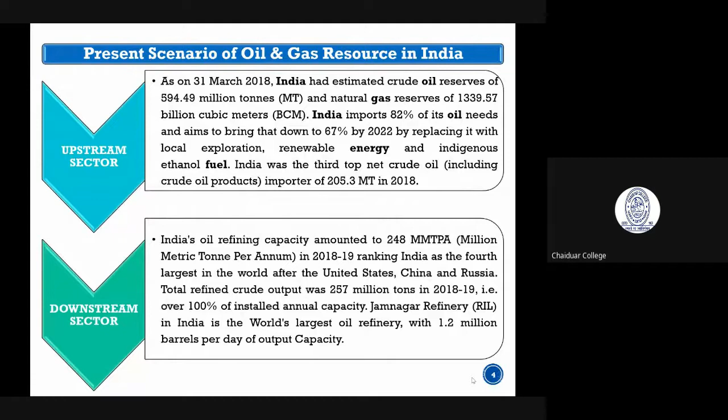Am I visible, Raju? You're not getting me. Yes, I've seen you. No, I got a message - this internet, it's due to some problem from my side. No problem, you can carry on.

So the entire sector is basically divided into three sectors: upstream, downstream, and midstream. Upstream sector is the sector which explores oil - they dig and find oil across the globe, like Oil India and ONGC. We find oil from beneath the earth. That is called the upstream sector.

Downstream sector is where crude oil and gas are used by companies and given as finished products to your home, like petrol, diesel, LPG. These are the finished products. That stream is called the downstream sector. So these are the two extremes - upstream and downstream sector.

Then there is the midstream - midstream is the pipeline sector. Whenever we produce oil in a particular field, we have to carry it to the refineries, isn't it? So that sector is known as midstream. Oil India works in all sectors - upstream, downstream, and midstream.

So what is the present oil scenario in India? As of my data, as of 2018, the oil reserve is 594.49 million tons, and natural gas is 1,339.5 BCM, billion cubic meters.

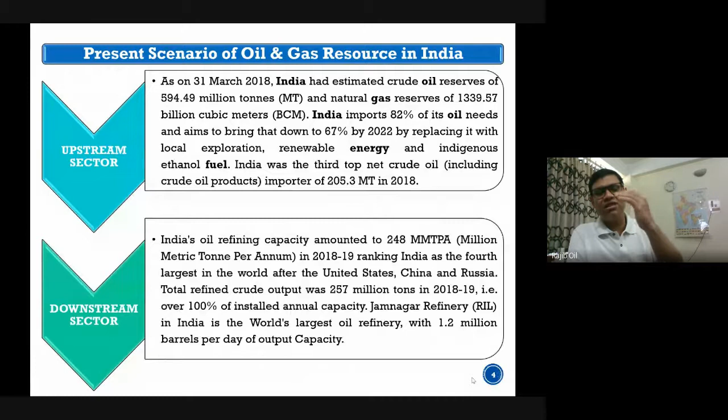Next is downstream - the oil refining. We have a total capacity of 248 million metric tons per annum. We actually have around 23, 24 refineries with different capacities. We bring crude oil from other countries, refine it, and supply it to meet the needs of the people.

As per the 2018-19 ranking, India is the fourth largest in the world in terms of consumer of the energy sector, after United States, China, and Russia.

It is growing daily because of our development. We are a developing nation, so development is going on across India, from Kashmir to Kanyakumari, from Assam to Gujarat. I'm not just talking about infrastructure development, but all sector development. These sectors need energy, so we are becoming the fastest growing energy consumer in the world as of today.

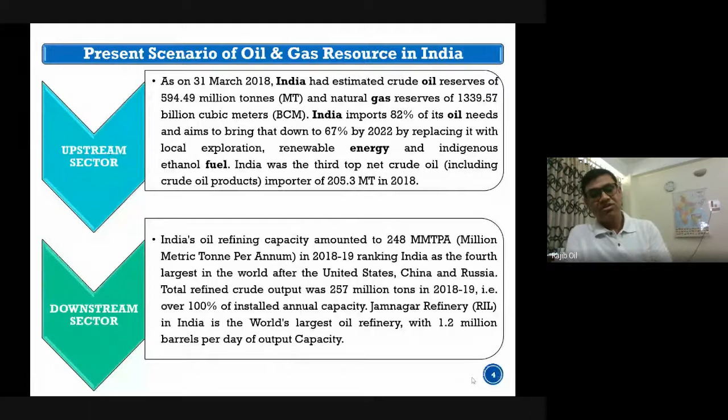So next, as I told, it should be 23 refineries - the 1 and 2 was mistakenly taken due to a copy paste technical glitch. So we have 23 refineries in India.

But how much do we actually have in India, or in Assam? We have 4 refineries, particularly Chaiduar, and nearby there is the Numaligarh refinery.

So I'm giving some history about these refineries. The Digboi refinery was the oldest refinery - it was established in 1901. Then subsequently we had 4 refineries set up at different times to meet the requirement of crude oil production in Assam.

But the current production we have in Assam basically cannot feed all the refineries. Those 4 refineries cannot be fed by the domestic production of Assam alone. So how much does Assam have? ONGC produces around 1.5, and we produce around 3.3 to 3.5, so you can say less than 5 million metric tons. But if you see the capacity of our refineries, Digboi is 1 plus, Numaligarh itself is 3, Guwahati is 1.5 plus, and I am not even speaking about Bongaigaon refinery. So that's why crude oil now has to be brought in from other parts of the world.

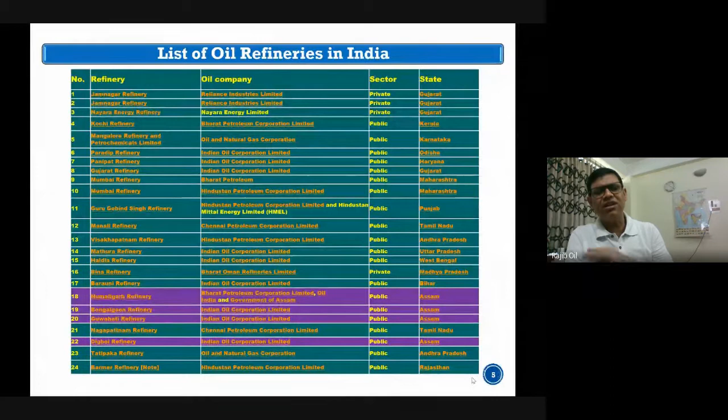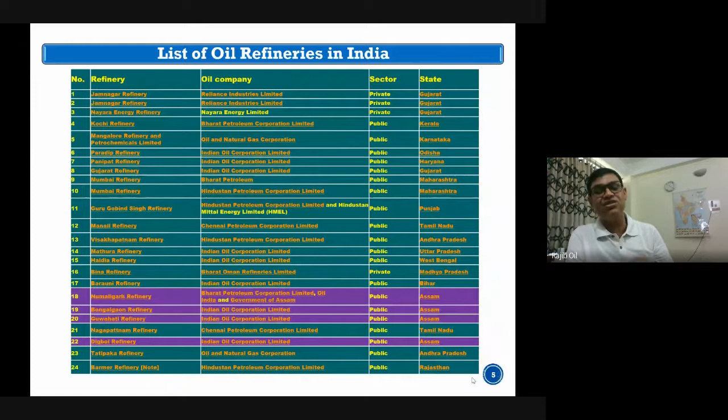You might have seen recently there was a survey in the Tezpur area also. I don't know whether Gohpur was covered. So another national seismic program is mapping from the nook and corner of India, to find where we have proven reserves. If reserves are found, the government is insisting on exploring them more and more.

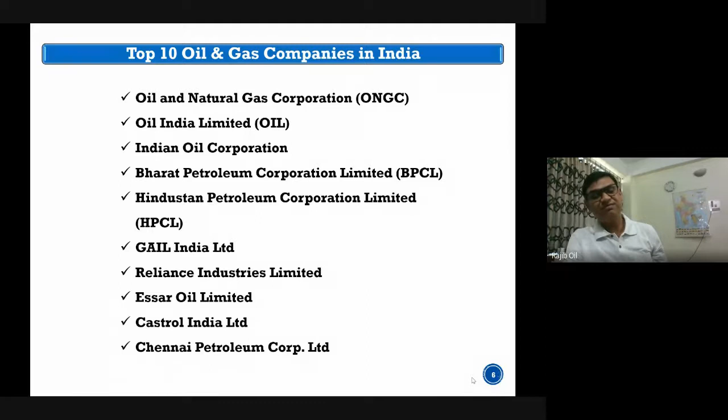So there is a chronology I have given. First of all, everybody knows oil was discovered in Digboi field by W.L. Lake of the Assam Railway and Trading Company. Everybody has heard some rumors about this - Digboi, 'dig boy', that it was found by an elephant. Actually, the oil was discovered accidentally, not intentionally. Their railway track construction was going on, and they had to cut wood from the forest. Then one fine morning, a person noticed that one of the elephant's legs was soaked with oil. They investigated and found that oil was floating on the surface. That was a dream discovery. So this was discovered in 1889.

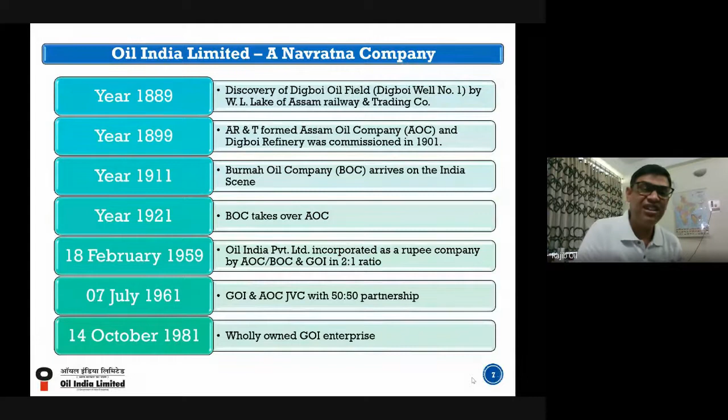Burma Oil Company, though the name includes Burma, it is not the Burma company, it is an England company, from a nearby Burma region. Then Burma Oil Company took over AOC. Though AOC was taken over by Burma Oil Company, AOC is still continuing, and the name is still continuing. Then on 18 February 1959, Oil India Private Limited was incorporated.

On 7 July 1961, Government of India and the Assam Oil Company formed a joint venture, a 50-50 partnership. On 14th October 1981, it became wholly owned by the Government of India.

So students, these details may not be relevant to you now, it might sound like French, but in terms of the business scenario, you will understand later. What you need to know is the first oil was discovered in 1889, and the first refinery was there.

I am giving you the background of Oil India. Now, Oil India is not a private company, it is a complete government company. We are the government employees of Government of India.

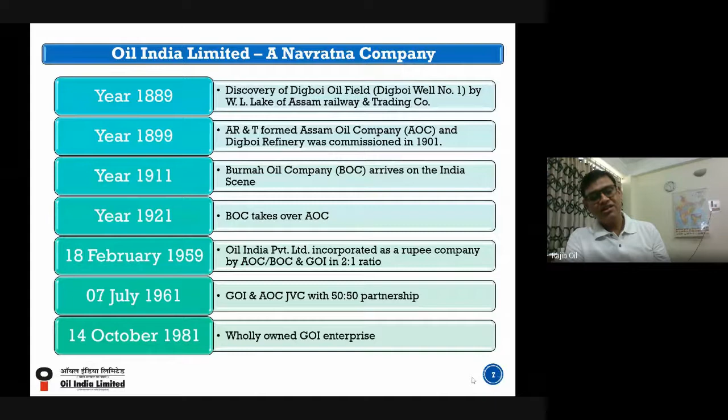Next slide please. So again, this is the chronology I have already told you: independent India's first commercial discovery was in Nahorkatiya in 1953. What Duliajan is today is only because of this. Earlier, Digboi was the center up to 1953. In Nahorkatiya in 1953, the first oil was discovered.

Now that oil is still flowing. I forgot to tell you, Digboi number 1, which was drilled a century back, is still producing. There is a very big museum there. If you have not visited, please visit Digboi to know the legacy of the oil sector, from the elephant to the man with sophisticated equipment. Everything is nicely framed there.

And then after 1953, Nahorkatiya, the Moran field was discovered. Moran was a very prolific producer, we produced a lot of gas there. Now the field is still there, but unfortunately Moran is dwindling now, production is not as expected. Anyway, the Moran field is still there.

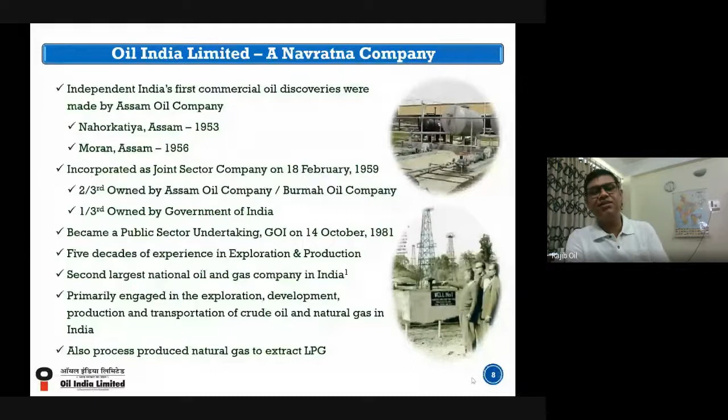So whatever LPG you are using in your kitchen, some of it may come from Oil India Limited, it is sure that some of it comes from Oil India Limited gas, and some LPG cylinders may come from Oil India Limited to you directly also. But since we don't have the business license, the business is done through our partner IOC. Next, please.

So our core business of Oil India Limited consists of exploration, exploitation, and transportation and refining. Exploration means finding out where your chance of finding oil is there or not. So there are some systems for that, like the seismic survey.

These are new terms to you. This seismic survey is basically a sophisticated survey, like a scanning of the earth. Whenever something goes wrong in our body, we do MRI, scanning, X-rays, all these. The seismic survey is nothing but that only. They're scanning the mother earth to find whether oil is there or not. After scanning, your technocrats can find out where oil is there or not.

Presence of oil is not the prime criteria - whether economically viable oil is there or not matters too. For that purpose, if oil is there or not, we have to drill. It is like an operation. So when doctors find from radiologists that some tumor is there in a particular body, then you have to proceed. Similarly, drilling is there to find out actually whether oil is there or not.

So on the basis of seismic survey alone, you cannot say that oil is there. For that purpose, drilling is a must. Drilling is nothing but - everybody has seen drilling, you may say you have not seen it, but you have seen the water pump. That process you have seen is a similar process, just in an advanced stage.

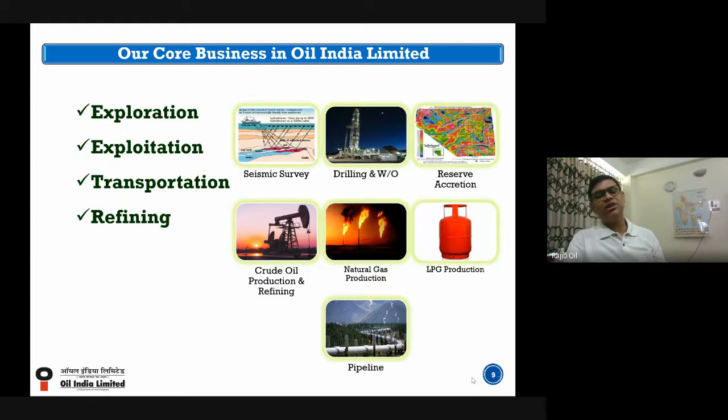So another pipeline is coming up from Duliajan to Numaligarh. You might have heard the Assam government has already announced giving gas to the kitchens of the people of Assam. So one gas gathering station is coming up. It will be fed from Duliajan and other parts of the country, so that people should not need to switch to LPG cylinders. It will be directly fed like a water pipe, to your kitchen in an economic and safety manner.

So oil business upstream, as I told earlier, consists of survey - the seismic survey I mentioned - and drilling of crude oil and natural gas, and production, and crude oil trunk pipeline, that's NSPL, the Numaligarh Siliguri pipeline I already told you about. Then DNPL, that is the Duliajan Numaligarh pipeline for gas, which I've also told you about.

Then LPG and production of NRL, and I missed one organization - BCPL, Brahmaputra Cracker and Polymer Limited. It is also in our loop. This Brahmaputra Cracker, popularly known as the gas cracker, is located in Lepetkata near Dibrugarh. The gas is fed by Oil India Limited, so it is also dependent on Oil India Limited. If Oil India Limited cannot supply proper gas, then BCPL cannot run. So to run the gas cracker and secure the future of Oil India, we must produce more and more good quality gas.

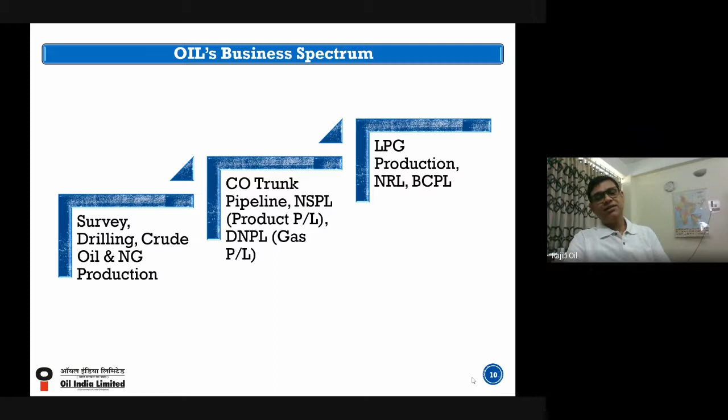So the oil business is geophysical. I have already told you, geophysical data processing and interpretation is nothing but the technocrats seeing how data is there.

Geochemical, I have not told. This geochemical is the role of the chemist. Actually in our curriculum, this is not part of this part of Assam. Though we are very rich with century-old operations, geophysics and geochemistry is not part of our curriculum. This is basically, I should say, a sorry state of affairs. Our university is doing all the conventional courses, but geophysics and geochemical, where employment opportunity is there and required, we have to create people of Assam trained in geophysics and geochemical, but unfortunately we don't have any course in any of the colleges and universities of Assam.

So I request through our principal sir, you please take this up to the higher-ups, so that they can introduce these courses in your college itself. This will be very great, and Oil India, ONGC will help you definitely in setting up this type of courses.

This geophysics and geochemical - we are studying physics and chemistry, the conventional courses. So these are specialized courses, geophysics and geochemistry rather. So we don't have geochemistry. We are doing the job of geochemistry, but we don't know chemistry - only the geology part. It is not really possible, but somehow we are running the show.

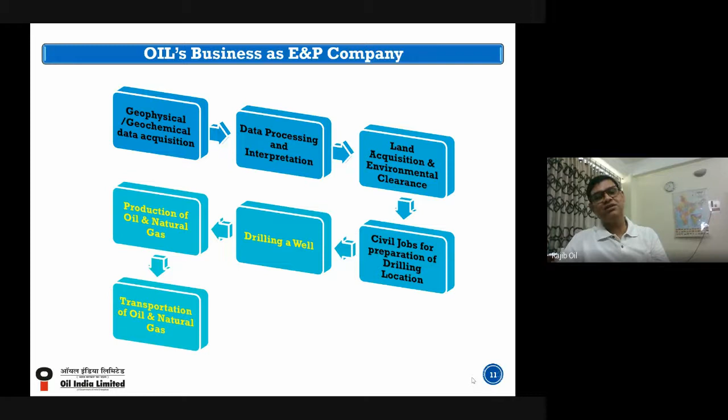So now let's come to where Oil India stands. Oil India is like a pan-India company, operating across India with many places. But we are more prominent in Northeast India - in Assam, Arunachal, and Mizoram. These three states we are operating in as of today.

But we have other parts too - in Rajasthan we are producing fuel. There are some blocks in Gujarat, some blocks in Kakinada where we are working, some blocks in the Kaveri Basin at the extreme bottom of India. Then we have operations in Bhubaneswar, that is Paradip.

Then there is some operation in Jodhpur. We have a producing field there - gas is being produced in Jodhpur and sold to the Rajasthan State Electricity Board. In addition, we have some wind power and solar sectors in Gujarat and Rajasthan. So these are the pan-India footprint of Oil India Limited.

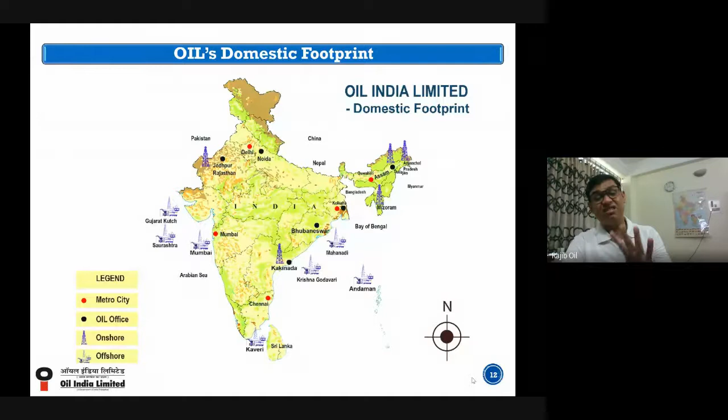So in addition to Pan India, we have international presence. We are working, or actually we have worked in Libya. Then we have 2 blocks in Bangladesh, which we are yet to operate there. Then we have some stake in Mozambique, Yemen, Nigeria, and Gabon.

Last year, oil was struck in Gabon. This is a very prolific field. Hopefully we can produce more and more oil for the country in Gabon. That one is not there in the map.

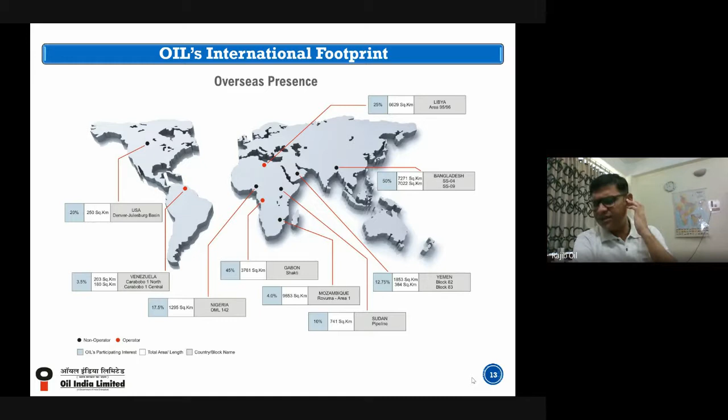We have a big stake in Russia, which is producing a lot of volumes of oil, and we have an office in the US and an office in Singapore also. These are basically commercial offices, but the rest are exploration stakes where we don't operate directly, we operate in conjunction with other companies. So we have a stake, and whenever oil is produced in those countries, that will be beneficial for our mother India.

So now I'll say something about how oil is being produced.

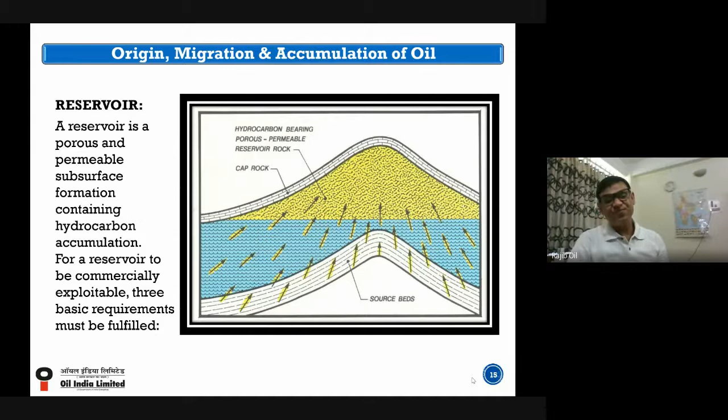Susuban, are you online?

Thank you. So next, there are some geological structural changes going on every day. Actually, over millions of years, our reservoirs are not smooth. Some reservoirs go down and up, and that is called the faulted reservoir.

For example, for common people, I am telling you about Burapahar, near your place. Whatever rock is on the surface at Burapahar, that rock goes down towards Upper Assam, going deep towards Duliajan and Hodia, deep around 5,000 meters. That means whatever you are seeing at the top of the hill at Burapahar, that is going down up to 5,000 meters at Hodia and Duliajan. So that is the place, the granite base, basically where oil will be there.

Oil will be there, but oil will not produce on its own. That particular formation is kind of a pot. That pot is there, going through from Burapahar to Hodia and extending further. It is not yet explored. So this type of geology is there.

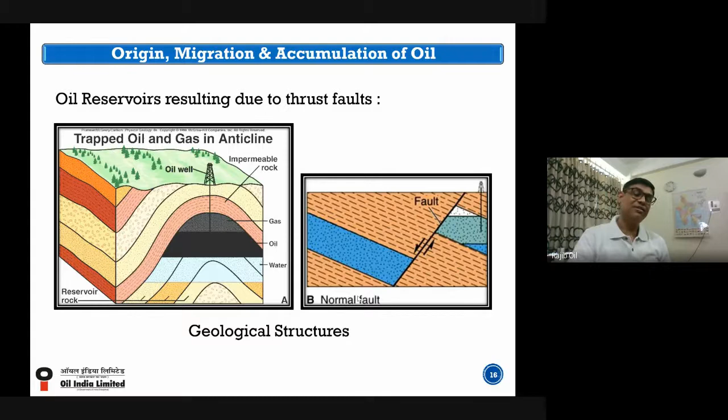So now what is the role of chemistry? The role of chemistry is in the geochemical and biochemical survey. Geochemical survey means studying whatever is there in the mother earth, and from that study we can predict if oil is there. This type of study is conducted by Oil India, and not only Oil India, the Geological Survey also conducts such studies. On the basis of surface geology and geochemical study, people can say that oil must be here. That is one of the angles of studying the presence of oil.

Next, coming to drilling. After getting the sweet point where oil will be there, we have to do drilling. For drilling, we need a fluid, the drilling fluid. Though I am calling it drilling fluid, it is popularly known as mud. Mud, we all know it as mud. It is like mud only.

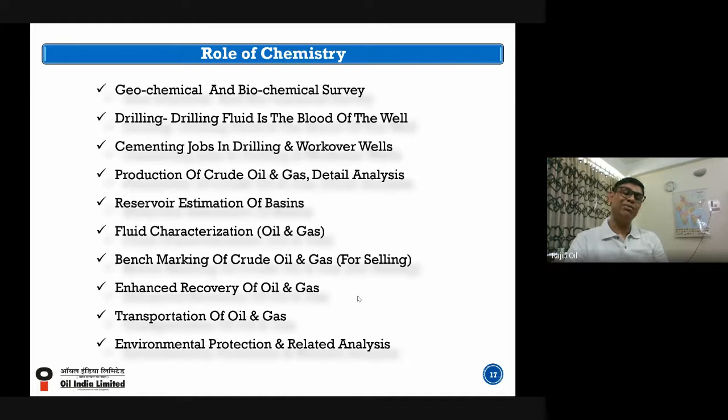That is the cementing job in drilling and workover. Cementing job is like our usual cementing only, nothing new. What we do—whenever we drill wells, you might have seen deep water wells where we don't normally cement; we just keep sand or whatever around it. But to give some strength to the pipe, we need to cement it. So cementing is done. It's normal cement, nothing special there, but since you have to cement a pipe from 5,000 to 6,000 meters, the technique and technology will definitely be different. So there your chemist's role comes in—you will design the cementing, how much water will be given, what components are there. That will be the job of the chemist.

Then, production of crude oil and detailed analysis. Production alone will not suffice; we have to analyze it too. Whatever is produced in India, in Nigeria, in America—their crude oil will definitely be different. So some mechanism is there to give the price based on quality, and quality depends on detailed analysis, which is done by our chemists only.

The reservoir estimation of the basins—reservoir estimation is nothing but figuring out how much reserve is there. The role of the chemist is there too. Fluid characterization is like the detailed analysis you have to do. Then there's the benchmarking of crude oil.

Benchmarking of crude oil means that every crude oil from different parts of the globe will have different parameters. So there are internationally agreed benchmarks necessary. Suppose your sugar level—how much is it? If it is more than 140, you will be called diabetic.

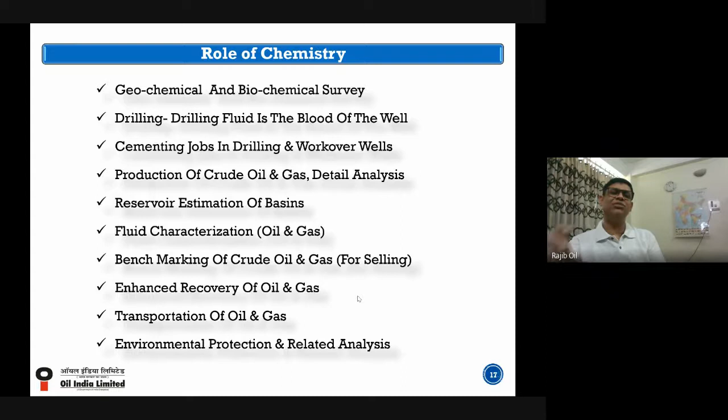So for all weather conditions, we have to give treatment. For transportation we need to import some chemicals, and that is being done. There's no general formula for this; you have to find it out internally, because people across companies will not share anything with you.

This is again, whatever you have learned, it is up to you. So we have an R&D center where we find out what chemicals are to be given to make it free flow towards our destination. Suppose Duliajan is pumping crude oil to Numaligarh, that has to be pumped as such, so there we need some treatment. We have processes that have to be derived by chemists only, people of chemistry only.

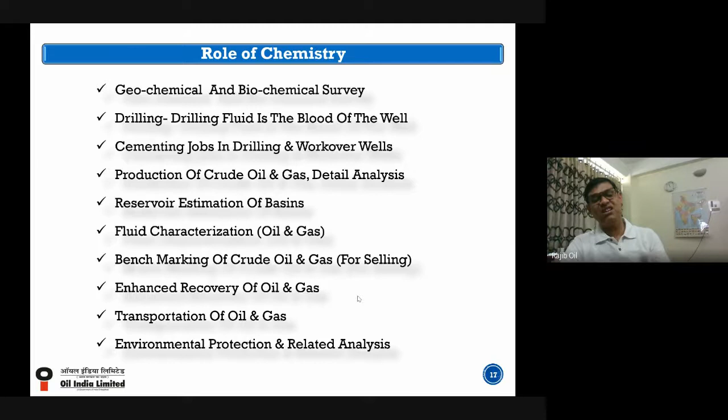Next, environmental protection and related analysis. Environmental is the subject of chemistry only. People are already there, and I guess some of you will be joining us in doing some of this.

Next, so now I have told you about the drilling. What is drilling? In the oil industry, drilling means the activities that involve making a hole from the surface to the subsurface of the required depth, and to case the hole to explore or produce oil. I have already told you it is a kind of only digging a hole, and now we are familiar with a water pump, which is only a few feet or few meters deep.

Now with this drilling of the hole, we have to dig. Oil India has till now drilled around 5,700 meters. This is the deepest well we have drilled. But internationally, there are 10,000 plus, rather 11,000 meter wells. India, we don't have that much of a deepest well as of now.

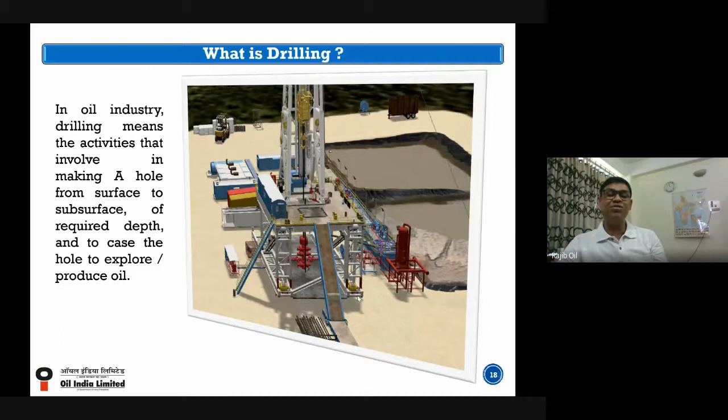So this is the drilling, nothing but what I have subsequently already told you. This is the drilling rig. I invite you to see the drilling rig by your own eyes, and it will be very clear. But a picture does not say everything always; you have to see by your own eyes. This is a drilling rig, I can say this much.

Next, so now this is actually the drilling. I was telling about the drilling actually on the surface only, that is onshore. That is called onshore.

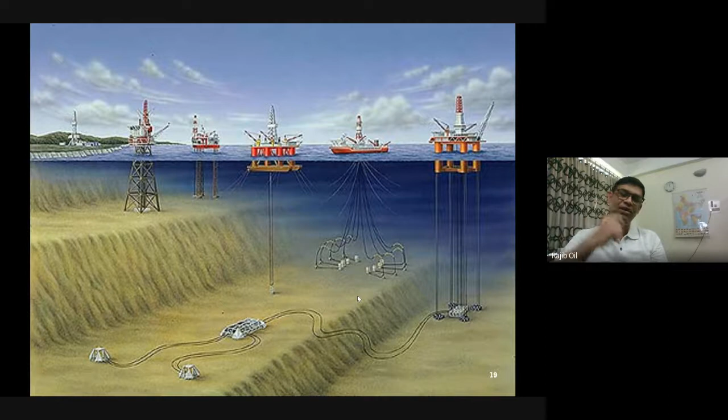But India had some earlier production in Andaman. Now we don't have any producing assets offshore, but India is going in a big way. In another 2-3 years, in Andaman and offshore areas, we will find crude oil from beneath the earth.

This is another picture of the offshore rig. This rig, if you see, is called a platform. This platform has 2-3 rigs on it. In this particular platform, they can dig a number of wells - 40 to 50 wells can be drilled from the same platform because of the cost.

How much do you think the daily cost is? I think you cannot imagine - it is more than 3 to 5 crores per day to run this type of operation for this rig.

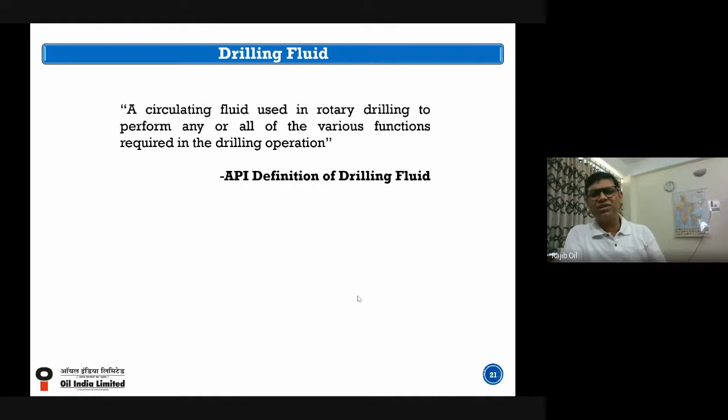Drilling fluid - I have already told you about this, that is where the role of the chemist comes in. The definition is like your chemistry definition: a circulating fluid used in rotary drilling to perform any or all of the various functions required for the drilling operation. For example, lifting cuttings from beneath the earth, cooling, and keeping the hole intact. These are some primary functions I shouldn't elaborate on now - it won't be easy for you to grasp as of now. But drilling fluid is where your role will be waiting for you.

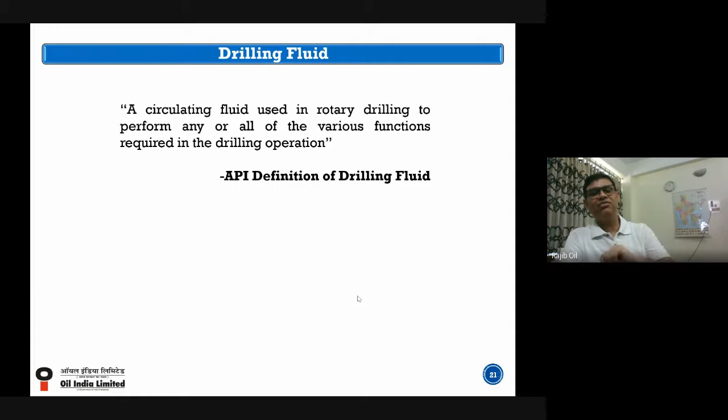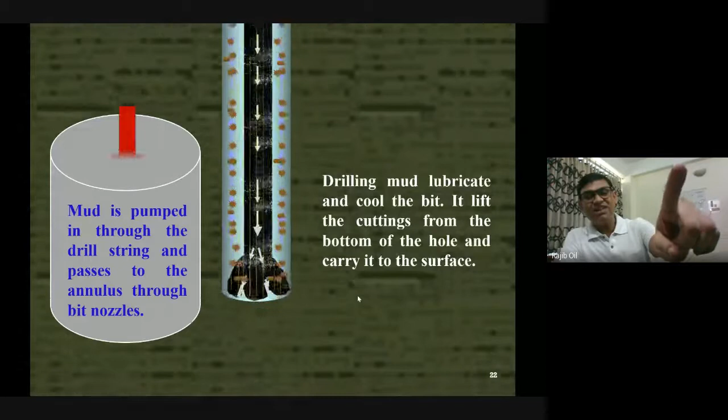So I'm giving an animation of this. What is drilling fluid? This is basically an animation of drilling. You see, this mud is being transferred - this arrow shows mud being transferred. It goes down and drills. At the bottom is the bit. The bit digs the earth, and whenever cuttings are generated, they are transferred to the surface - you see it coming out.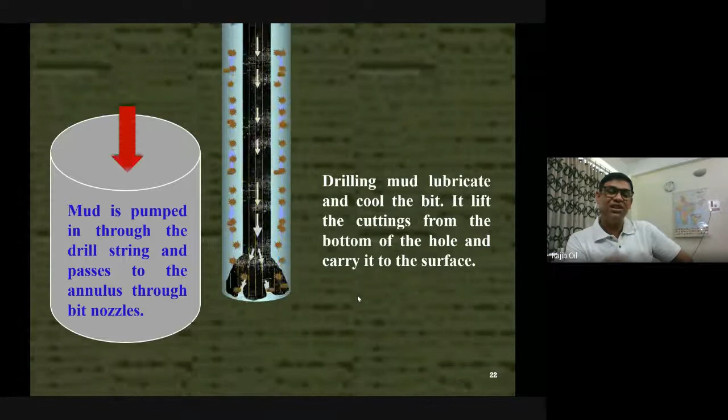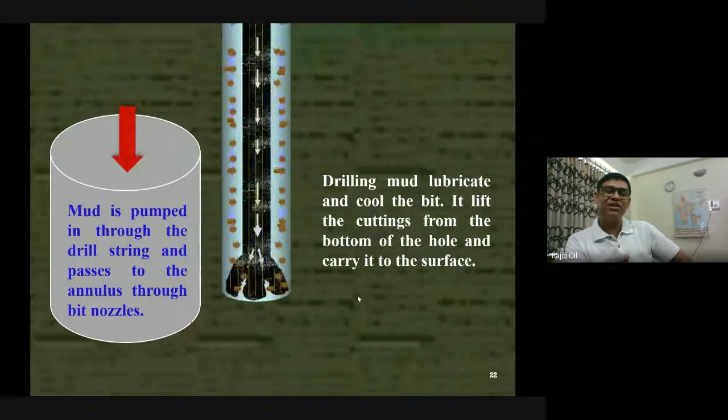During this drilling, you have to maintain and design the components and other factors. Whenever you are in the business, you learn these things - that is the role of the chemist. The chemist has a very important role. Unless the chemist gives good quality drilling fluid, drilling cannot be possible. So you should know how important this post is for the nation. You should be proud, because through the drilling chemicals and drilling fluid you supply, a well can be drilled, and through the well oil can be produced, and through oil our energy requirements can be met. Basically, you are the energy warrior if you do these things.

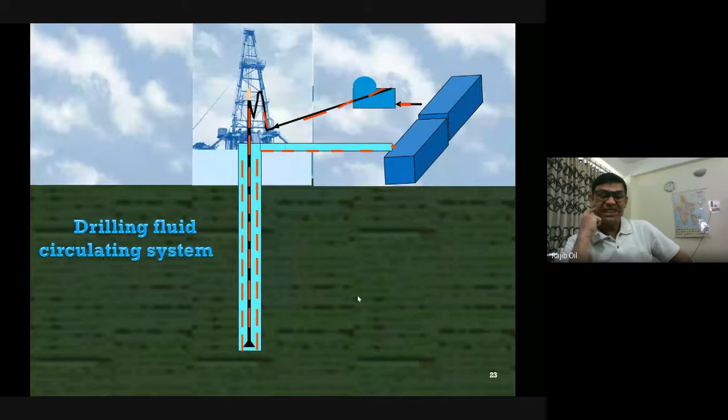So this is again an animation. Drilling is there, and this is the mud tank. Mud tank is nothing but the drilling fluid tank - we usually don't call it drilling fluid, we call it mud tank. We store the mud in the mud tanks, and it is pumped through a pump, drilling and coming out.

Why do you require circulation? Because you have to treat it. Suppose when it comes out of the well, it comes with garbage and some deterioration in quality - you have to maintain and treat it. The same amount of mud can be reused, because the mud is environmentally very sensitive - you cannot just dispose of the mud into the earth. There are some ways to handle it. The same mud has to circulate like your blood - just like your blood takes oxygen and gets purified.

Same way the blood is being purified by different systems, we are purifying the mud. Sometimes our blood may be, because of some disease, you have to discard your entire blood. Same way we have to discard the drilling fluid to save our wells.

But there is a cost, because very costly chemicals are being used. Some of the chemicals cost in the tune of 10,000 per kg, and there is some volume required. So this is a costly affair, costly business. You have to be very meticulous in using and in designing, so that there is minimum wastage.

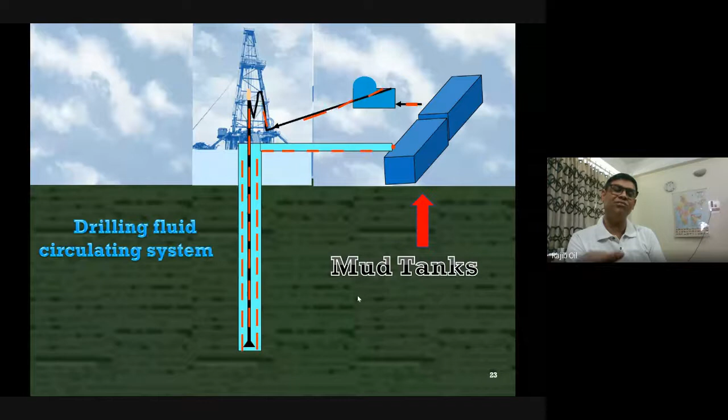So there is a role of chemist. You have to be very sensitive in terms of using, in terms of your intellectual mass, so that you get a better mud or drilling fluid to get a good hole.

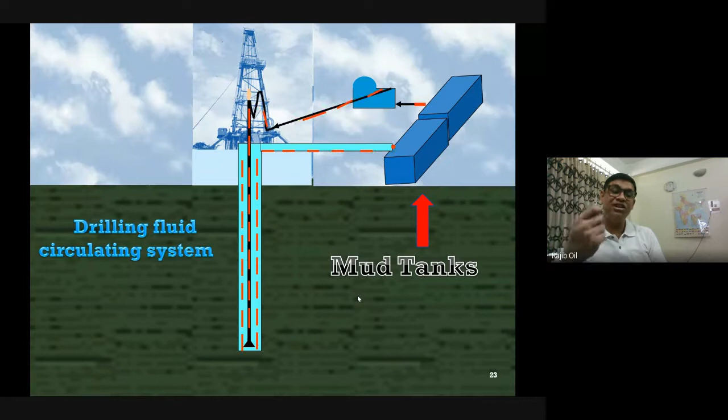Next. So now I have told everything about the industry and the role of chemist and like. Now I'll be coming to career. Any questions as on now? I have not seen anything till now. If anything there, you can question me.